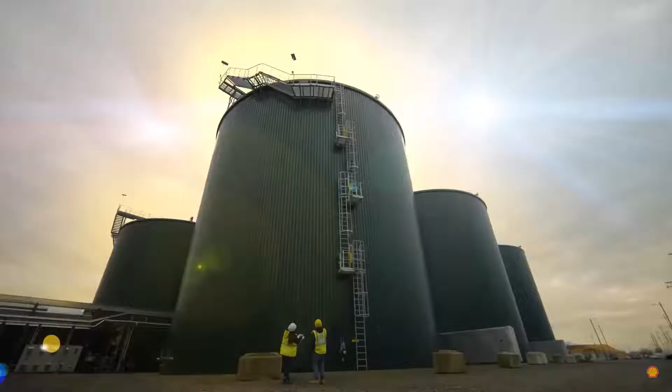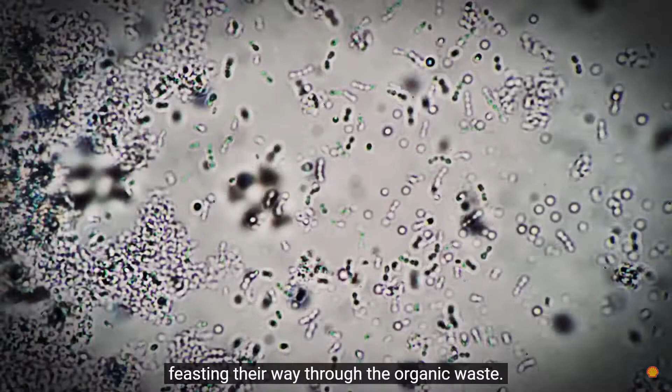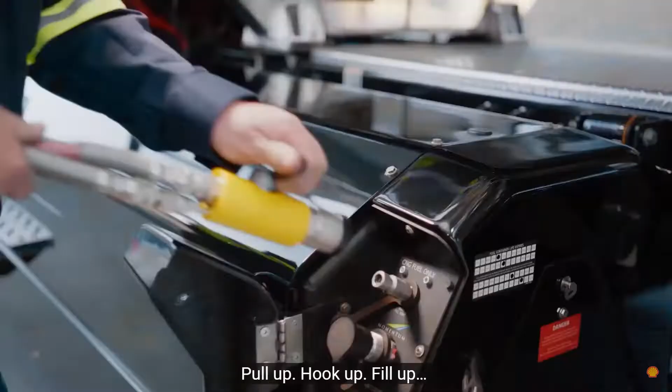Natural gas: organic waste like manure or even food waste is collected up, then it's put inside a digester, or as my scientist friend Anna likes to call it, a giant mechanical stomach. Here's a really small version. Inside, millions of microorganisms are feasting their way through the organic waste. As they eat, they produce gas, which is filtered and collected to make pure natural gas. And what's really cool is that it's just like the natural gas that comes out of your pipes at home, except this stuff comes from cows. Shell is investing in all kinds of alternative energy sources, and now they're busy building renewable natural gas facilities, like the one in Oregon. We make enough renewable natural gas in 1 year to drive a truck from San Francisco to New York City over 10,000 times. That's pretty cool, eh? So let's be clear: converting to cleaner burning energy is a smart choice. From production to combustion, RNG prevents emissions from organic waste, and it's an alternative fuel from Shell that's right here and now. And as for refueling, it's like any other truck: pull up, hook up, fill up. And that C in the logo stands for compressed renewable natural gas. There's enough in the tanks on that truck to drive over 600 miles using proven, reliable technology. Shell is putting waste to work while lowering costs and emissions. Now that sounds like powering progress to me. To learn more, just reach out to the RNG team. Woo-hoo!

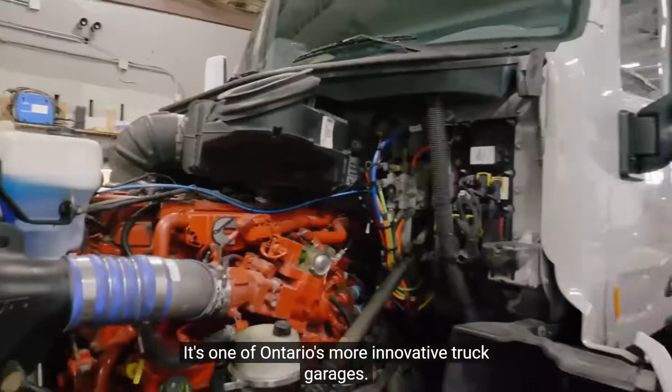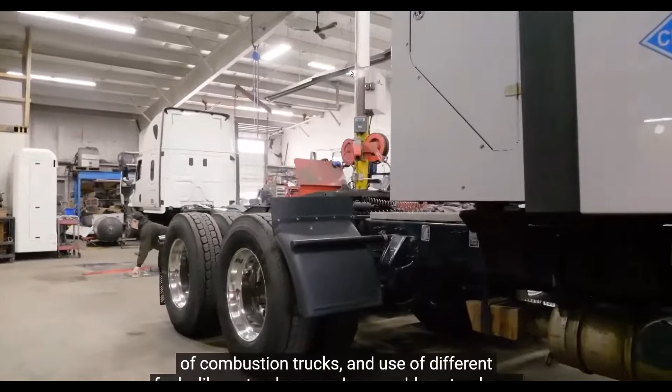You're here with me at Hiller Truck Tech in Cambridge, Ontario, one of Ontario's more innovative truck garages. Some of the cool things they're working on include trying out different engines, hybridization of combustion trucks, and use of different fuels like natural gas and renewable natural gas. The trucking industry has been built on diesel trucks for a long time.

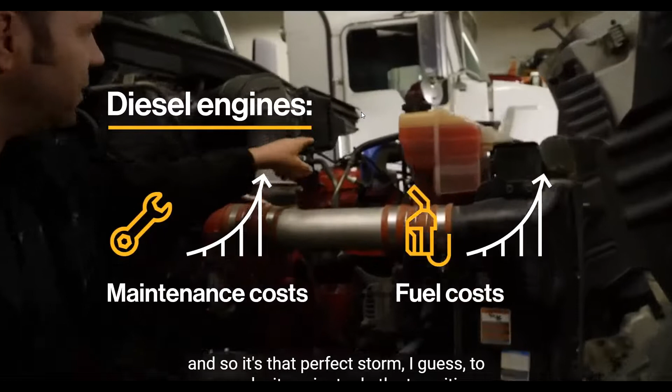Now here we are today where diesel prices are at levels we've never seen before, and we have repair costs of diesel trucks at levels we've never seen before. So it's that perfect storm, I guess, to now make it easier to do the transition.

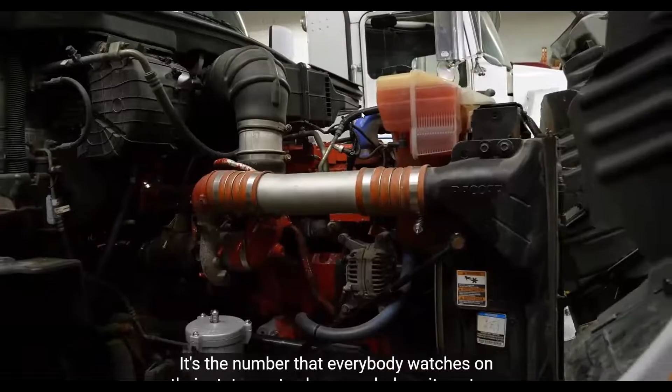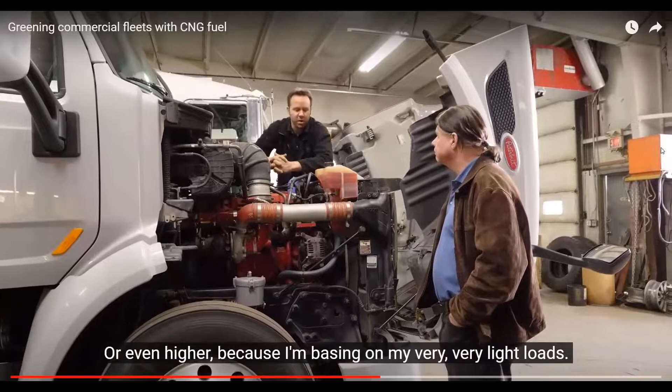Natural gas is a perfect stepping stone to go from pre-emission to newer trucks. Over diesel, I'm saving 50% of my fuel costs. It's the number everybody watches on their statements—how much does it cost me in fuel to run this truck down the road? Most diesels nowadays are at $1 a mile, or even higher, because I'm basing it on my very, very light loads.

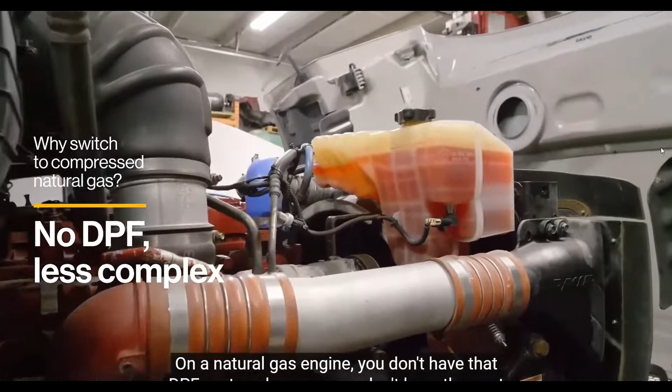It's very difficult to lower emissions in trucking just because of the nature of combustion. What makes natural gas trucks special? Well, the fuel itself has a much lower carbon intensity. Renewable natural gas, another fuel used by these trucks, can be zero carbon or even negative carbon intensity. On a natural gas engine, you don't have that DPF system because you don't have the soot coming from the natural gas engine. You have less repairs on these trucks compared to diesel trucks.

Fueling's so easy—it's 10 minutes, you're in and out. I can run basically Windsor to Ottawa, and as far north as Sudbury or North Bay. Natural gas is where it's at right now. Very exciting times for the industry.

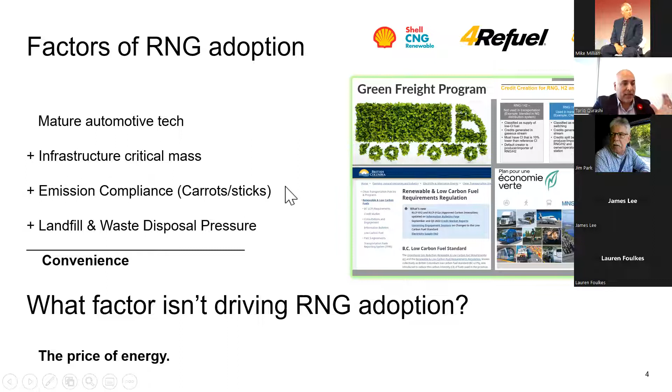To me, the paradox or puzzling thing is that the leading driver of RNG adoption is not so much the actual economic value proposition, it's all this other stuff on the left-hand side. It's as though the ROI or payback of the business case is almost a residual or leftover from these market catalysts. So let's attempt to unpack these drivers a little bit.

In a head-to-head comparison, RNG is the only fuel that can achieve a negative carbon intensity, or CI value. Landfill-sourced RNG has a low but still positive CI compared with diesel. Source-separated organics such as household waste can produce RNG with a nominally negative CI value, which is still something to write home about. But RNG produced from cow manure enjoys CI values order of magnitudes lower than diesel. This example on the green bar is admittedly curated, sort of cherry-picked to make the point. But that said, it's still quite intriguing that avoided methane emissions can basically stomp on the GHG scale more effectively than a hydro dam or a nuclear reactor, and as such remains the only scalable carbon-negative solution.

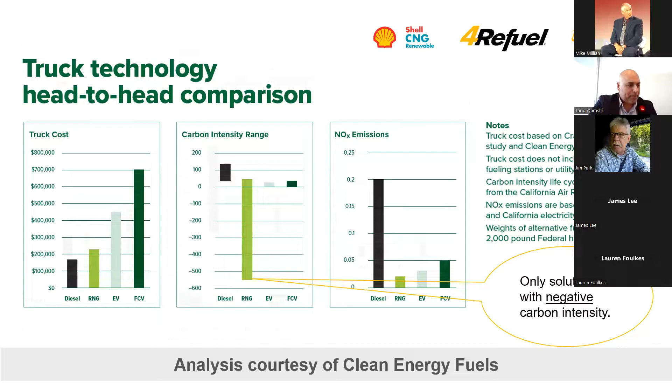To finish off the tech comparison, this analysis provided by Clean Energy also points out that payload, range, and refueling time are in line with diesel, to say nothing of the avoided headaches and complexity associated with SCRs and DEF, which, to be fair, you would also get with electric trucks. The applications for RNG should broaden even further when Cummins' 15-liter engine is released in North America.

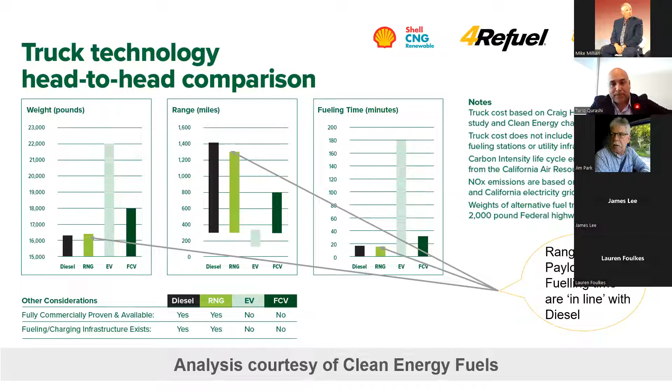So the remaining slides highlight some newsworthy items related to RNG. Starting on the left, Amazon ordered over 1,000 CNG trucks - the number is actually closer to 2,700. In fact, just a couple of weeks ago, Clean Energy opened a new station in Ohio specifically for Amazon. NGV America has published a report that delineates how California trucking has actually achieved negative carbon intensity, or carbon negativity, using RNG.

So if you're new to this topic, around this time last year, Cummins announced the new 500 horsepower 15-liter gas engine, which is 10% more efficient and several hundred pounds lighter than the old 12-liter engine.

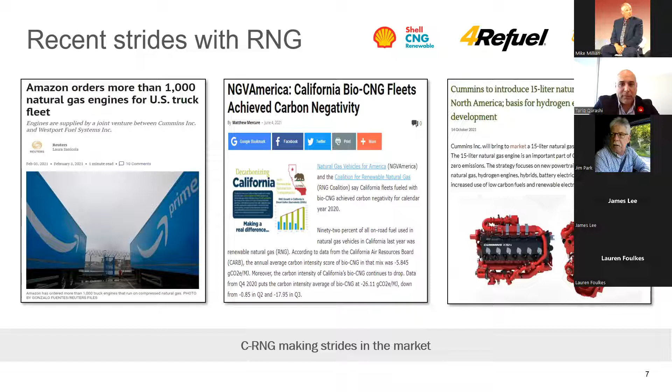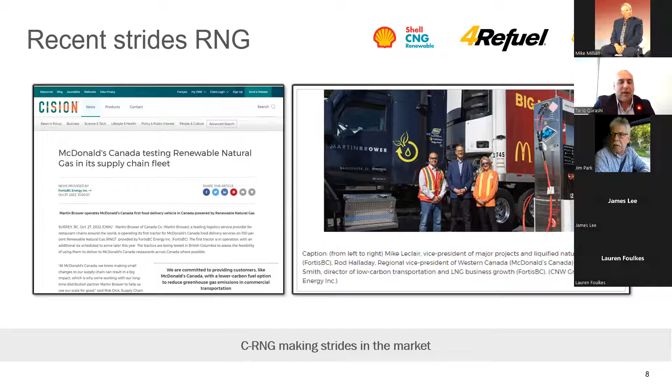And hot off the press, this week it was revealed that McDonald's Canada is working with their carrier Martin Brower to use RNG to decarbonize their supply chain in British Columbia with FortisBC. Now, with McDonald's connection to beef production and distribution, the use of RNG is sort of obvious, but it portends a great story for what we could do in Canada with our outsized agriculture base.

So earlier this year, PACCAR revealed that their Kenworth and Pete trucks will be the first to carry the new 15-liter engine. By itself, this is a big deal. However, it's made an even bigger deal by the fact that Cummins and PACCAR will also integrate transmissions, fuel storage systems, which in turn should drive economy of scale, efficiency, quality management, and supply chain benefits. I think that's something that shouldn't be lost on us - the integration of not just the engine but the other power components makes it more difficult to mess up a CNG truck, because there's one throat to choke, so to speak.

Not to be outdone, Westport Fuel Systems has revealed that they are working with Volvo to bring over fuel agnostic HPDI trucks that can burn liquefied RNG and or hydrogen or blends thereof, which is great news. It's not just a couple of players.

Now I'm going to talk a little bit about what we've done specifically at Enbridge Gas. In March 2021, we approached one of our longstanding customers, Hamilton Street Railway Transit System, to adopt RNG and help us get the message out. That was a success. As a proud Hamiltonian, I love watching this bus drive up and down our streets, and it's something I can point to my kids and say, look, Dad's involved in that.

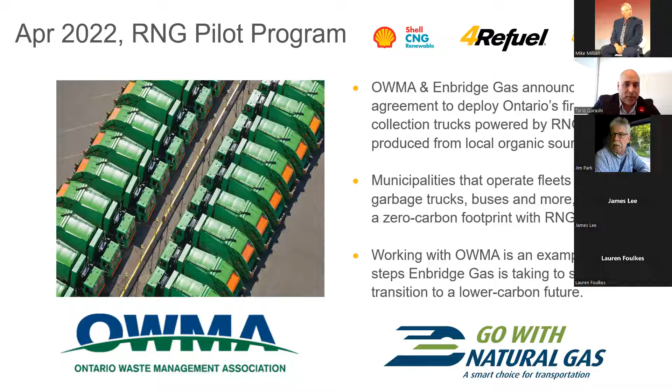So we approached the OWMA. They worked with us to help identify a stakeholder that would take this idea on, and Bluewater Recycling stuck up their hand. In Huron, Ontario, 22 municipalities have access to this truck, and this truck was launched in August.

It comes with all the benefits you get with RNG, and it's powered by waste that comes from a farm just outside London, Ontario, Middlesex actually. And it's a great story.

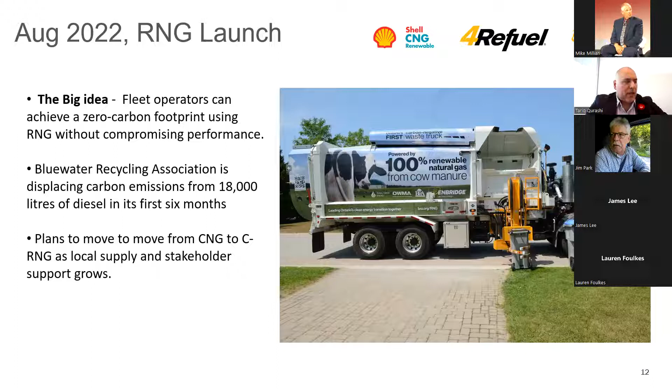As Jim indicated earlier, it's the holy crap factor. It's the fact that cow manure is powering this truck, that's sort of driving curiosity, and intuitively it makes sense. Basically it looks like I'm going to have to put Francis Vieux, the president of Bluewater, on some kind of world tour, because his phone's been ringing a lot. This story's been published over 40 times, and he's done much more than 6 interviews -- I think it's closer to a dozen now.

So I'm almost done. Can't speak that much to Western Canada, but I do know that there are public fueling options available. But I want to level a challenge to the members of the PMTC. Across Canada, there's certainly a comparative lack or lag of infrastructure compared to the continental US, where there's 700 odd CNG stations capable of powering trucks.

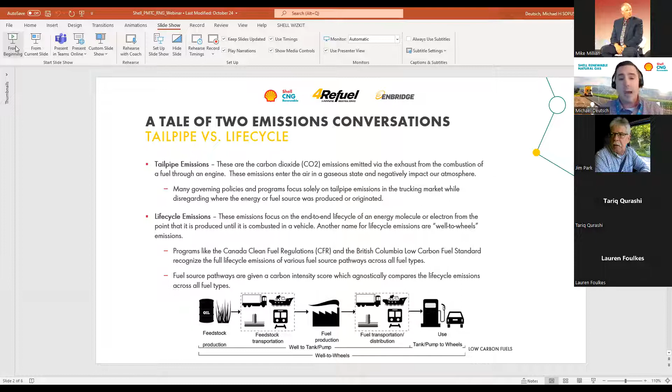So where so much of the conversation seems to be centering right now is around this just tailpipe logic—that I don't have to worry about where my batteries came from, my hydrogen production came from, my natural gas feedstock or any other things came from, because I'm only going to focus on the tailpipe. Unfortunately, depending on where you are in a market, if you're in West Virginia, you're looking at basically an 80 to 90% grid powered by coal. So is that clean electricity? No, it's not. But that's where we have to be able to have these open conversations and say, let's look at that end-to-end life cycle picture.

So how do you measure life cycle emissions? Life cycle emissions are calculated on what's called a carbon intensity score. Tariq mentioned that a little bit earlier in his presentation. A carbon intensity essentially can be defined as the fuel's life cycle, or well-to-wheel, greenhouse gas emissions that are emitted throughout that whole fueling value chain, ultimately to where it is combusted. So what this means is that every fuel source can be compared agnostically to each other. Because battery electric doesn't have a tailpipe, it's automatically classified as zero emissions.

But again, you have to ask yourself, where did my energy come from? Am I running clean trucks, but running them on a dirty grid? Same thing in the hydrogen space—where did my hydrogen come from? And the list goes on and on. You could run on propane here, possibly, and you have to ask yourself again, where did that come from?

So as your customers are pushing you to run greener or cleaner trucks, that's going to be one of the asks—what type of fuel source are you using and what is the carbon intensity of that fuel source? Especially if you are large private fleets with your own ESG goals to meet, there's going to be asks around what our carbon emissions reductions are by running CNG trucks versus EV versus hydrogen. So again, you have to think about it in a life cycle end-to-end picture.

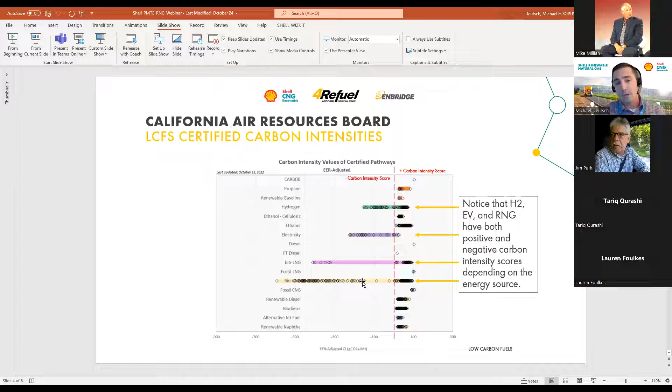So my takeaways that I wanted to leave you guys with: number one, your decarbonization strategy should be focused on life cycle emissions, full stop. If it's not, and you're only focusing on tailpipe, then you might be doing yourself a disservice and possibly your customers a disservice. Number two, zero emission vehicles does not mean zero life cycle emissions. It only is focused on tailpipe emissions. And that's great, but if you don't know where your energy source is coming from, then you're missing out on the entire picture that is decarbonization.

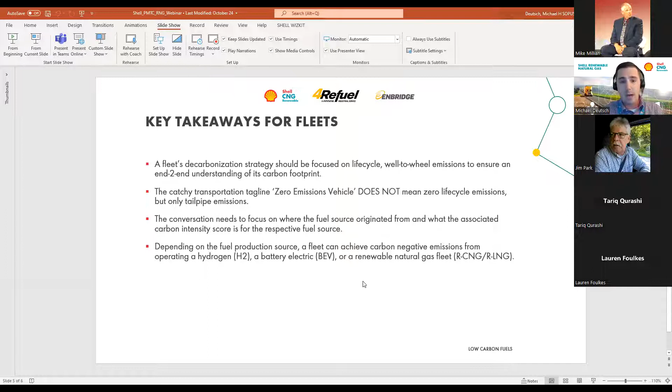So the other aspect of it too is focus on where that energy source came from, and know that whether it's a hydrogen truck, a battery electric truck, or a renewable natural gas fleet, you can possibly be at zero or below zero depending on your energy source. And with that, I'm going to hand it over to Lauren to walk you through some of the additional details around RNG.

Michael, thank you. That was a great explanation of carbon intensity. I've used that similar chart in a number of stories in the magazines, and I've had comments from people that say it's just mathematical trickery, make the numbers work any way you want them. They don't seem to believe that the carbon intensity numbers can be as low as the California Air Resources Board says they are. So thanks for fleshing that one out for us.

I would also add, just as an interesting point, California, who's big on zero emissions, battery electric going all in the next few years - of all the natural gas and renewable natural gas used in the state of California right now, 98% of it is renewable. That's up and down the West Coast into Oregon and to some extent into Washington state. There's vast supplies of it from the swine farms, and the trucking fleets are taking full advantage of it. But they don't get any credit for it out there. It's all about batteries as far as CARB is concerned.

So I think we do need to apply a bit of pressure at certain points to get governments to understand that this is not a bad thing. In fact, it's quite good. Anyway, I'm going to bring in Lauren Foulkes now to carry on with her presentation.

Another 10 minutes of elucidation. We'll all be a lot smarter when she's finished.

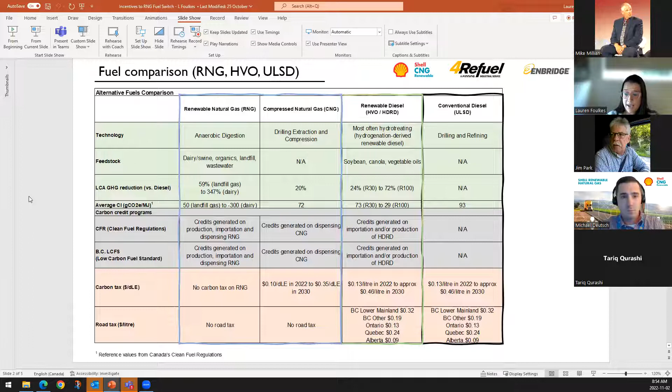I'm going to take a level deeper here and look at government incentives. One hot topic that everybody's talking about if you're in the CNG and RNG industry is the Green Freight Program. This program is not new, it's been around for a number of years, but it's been overhauled and enhanced due to sheer demand to do more in this space. As we all know, there's a lot of funding for electric, $1.7 billion Canada's put forth for decarbonization through electric. We kind of say, what about these other alternatives, using RNG, etc.? So the Green Freight Program, being enhanced in 2023, added robust funding, $200 million total funding in that program. I have a slide where I go into more detail there. I've been consulting with that NRCan team directly, so I'm able to provide probably a little bit more insight that's been shared. So I'll pause on that one.

But there's also provincial programs. Quebec Eco Trucking has a program that's not new, it's $1 million of funding per year per applicant to cover approximately 50% of the additional cost of the CNG tractor, approximately $30,000 per vehicle. And then Shell in certain markets has a 30-30-30 program in BC which is very compelling: $30,000 incentive paid toward purchase or lease of a new or qualified CNG truck, they guarantee a 30% reduction against diesel costs, and up to 30% in the residual protection payment. So it's a very attractive program for BC-based fleets, in place with Shell there. The important note I have on these is these are stackable programs, so you can take the Green Freight Program, apply for that, and then stack it if you're in Quebec against that program, or stack it with Shell in British Columbia.

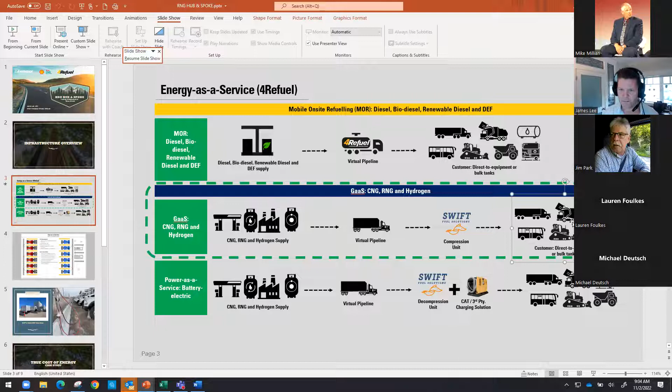Today, we're going to talk about this middle swim lane, this idea of setting up infrastructure across Canada and North America, small stations that can serve two purposes, not only under the canopy fueling, but also a place to fill these tube trailers and deliver these tube trailers through to the client sites where they can consume the renewable natural gas.

On the next slide, we're going to see a depiction of the infrastructure, which is actually quite simple. Firstly, we talked about the SWIFT unit, a compression unit that basically just needs to be powered at the site. And then we have these tube trailers that will refill at the stations, the hubs, and be delivered daily to the client site, connecting to the compression unit, connecting to the parking lot. The parking lot is basically plumbed with posts where the trucks fill up.

The driver walks in, plugs their truck in, and walks away. That compression unit will fill those trucks till they're full, and through an automated manner, stop. The trucks are full, and the driver gets in the morning, unplugs, and drives away. So when you think about the infrastructure required at any site, it's quite simple. You have the SWIFT, the trailer, some site infrastructure plumbed, and you need power, and that's all you really need to put the infrastructure on the ground.

Now, what are the big value drivers here? First of all, as you can imagine, you have the labor savings. So instead of drivers driving to stations, in this case, if they're returning to home base, and a lot of times fueling on overtime because you're stretching the day with non-core activities, you have your drivers drive home, park in their parking spot, and plug in. So first of all, you have a labor savings specifically around overtime through this solution. You've got modular energy capacity.

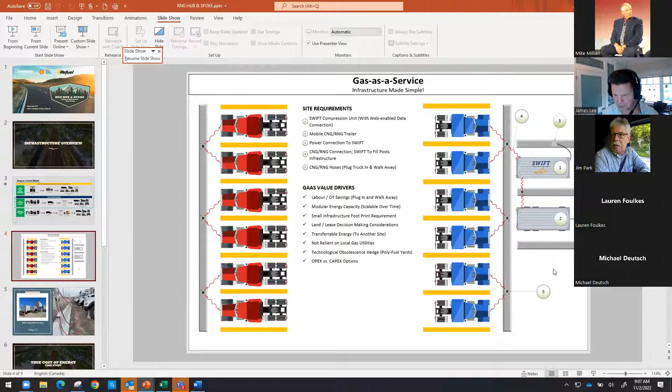You can literally have a portion of your fleet set up for battery electric, a portion set up for renewable natural gas, and a portion using traditional renewable diesel, to achieve full decarbonization across different fuel types.

But you're not tying yourself into one technology by putting some sort of infrastructure at your site. This idea of keeping your options open over time, and not tying your energy choice to your lease or your land use, is quite compelling.

And lastly, there's the idea of reducing your CapEx costs by tying gas-as-a-service, energy-as-a-service into OpEx versus CapEx, which can be a very compelling argument for some folks.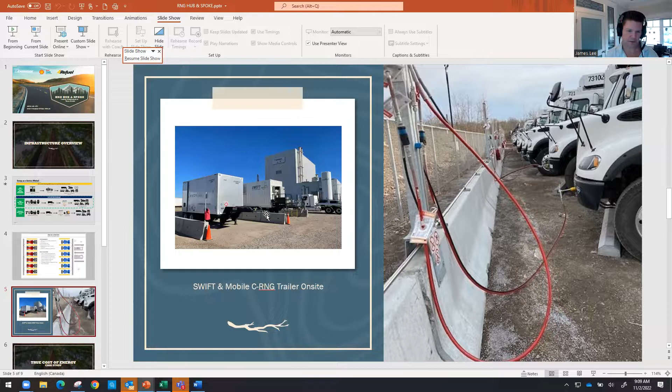I'm going to try to tie all this together in a real world case study based on a point in time. In this example, I'm taking a 40-truck fleet with an average fill of 135 liters per day, 5 days a week, which annualizes to a site volume of about 1.4 million liters. On this given day, the delivered diesel price was about $1.76 per liter, and the equivalent RNG delivered price was about $1.01.